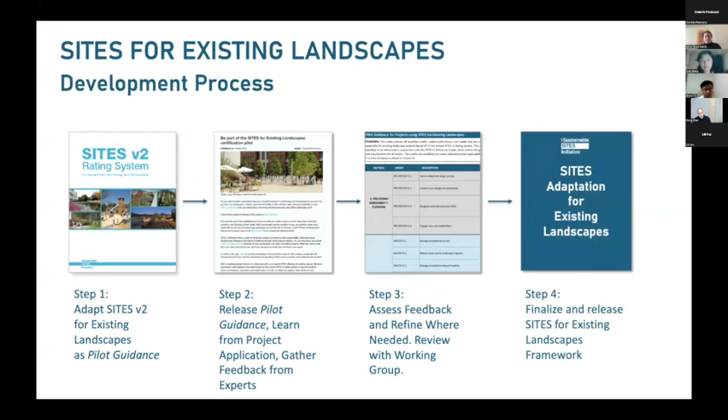I would like to introduce right away Brown Xu from GBCI North Asia. He's going to be our first speaker. I'm going to introduce all the speakers because after Brown, we will head right down our speaker lineup. So first of all, Brown joined GBCI and USGBC in 2018. He's the Director of Market Transformation and Development. He leads the marketing development and project support. He facilitates the growth of GBCI's sustainability programs in the region, including LEED, the LEED Green Building Rating System.

Brown has long worked to move the industry forward, facilitating projects including the first volume program in China, the first LEED for Cities Planning and Design project, and has participated in 2 industry committees, including LEED Data Center Advisory and LEED Logistics Advisory. Brown, before I pass it to you, I'm also going to introduce our other speakers.

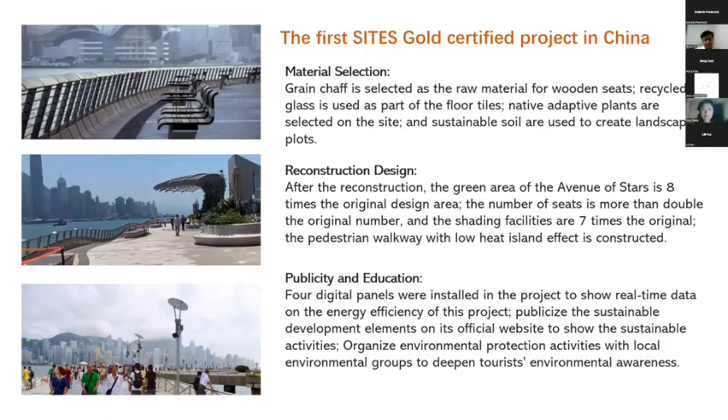The next project is the Runway Park in Shanghai, which is the first SITES certified project in mainland China. This project is very interesting. Actually, it was an airport. When the local government wanted to reschedule the city planning, they thought the airport could be transformed into an urban space for citizens and office workers to relax. This project was developed by Sasaki and Trent, who are our panelists today. They did a lot of fun work to engage people in the park.

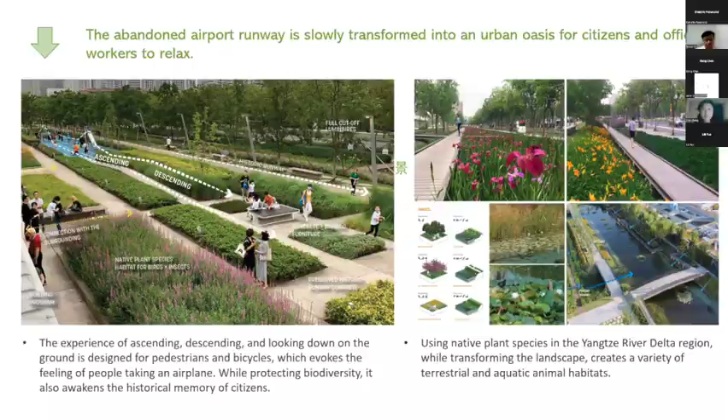The next is the 10th China Flower Expo, which is the world's largest SITES gold certified project. The certified area is about 2.6 square kilometers, a very huge project. The purpose of this flower expo is to collect different flowers from China to show to the public, while the project team also tried to keep the biodiversity and make the ecosystem stable. So 60% of the vegetated area is planted with native plants of Shanghai.

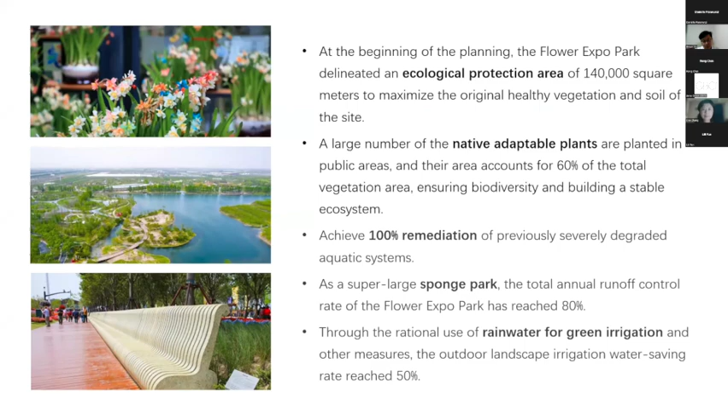They also did very good work on water treatment. In the project, they have a super large sponge park. The total annual runoff control rate of the park has reached 80%. I will talk about this concept later. Next is the Bai'etan Exhibition Center. I will leave this project to our leading actors, the consultant, the designer, and the owner, and they will give you a wonderful introduction tonight.

When we went through all the projects, we also wanted to find out why many projects now realize the value of sustainable landscape and want to pursue SITES. We think a very important reason is that China has set a very clear carbon emission goal. Chairman Xi has announced that by 2060, China will reach carbon neutrality. That really reminds a lot of people of the value of sustainability, and more people realize that sustainable development is not only about energy, it can be adopted in every industry. So we think this is a very important foundation.

The second is about the sponge city. I would say that is a very special term in China. You can see on the left of the slide that in 2015, the government already set a very clear goal that cities in China will collect and utilize 70% of the rainwater. 20% of the urban area needed to meet the target by 2020, and the proportion should be raised to 80% by 2030. So it's a very clear government activity to promote the sponge city. And China has already designed its own standard, which was officially implemented nationwide in 2019.

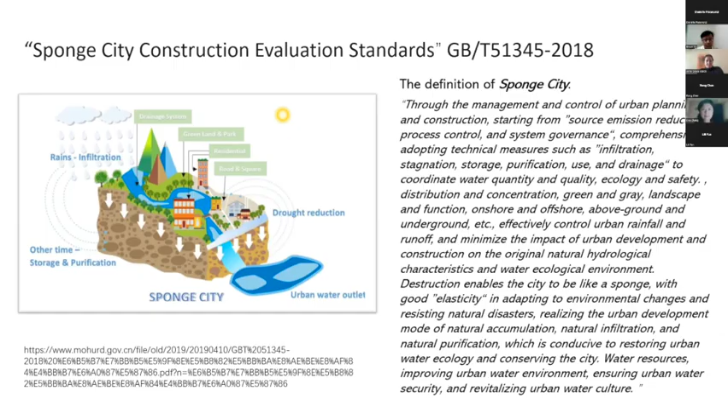So I will just introduce an example of sponge city in China. It's a very small city, which is Pingxiang. It's located in Jiangxi province. And this city actually is a very old industrial and mining city with depleted resources, so its infrastructure is very weak. So every year when you have a big rainfall, floods occur. You can see a lot of those pictures.

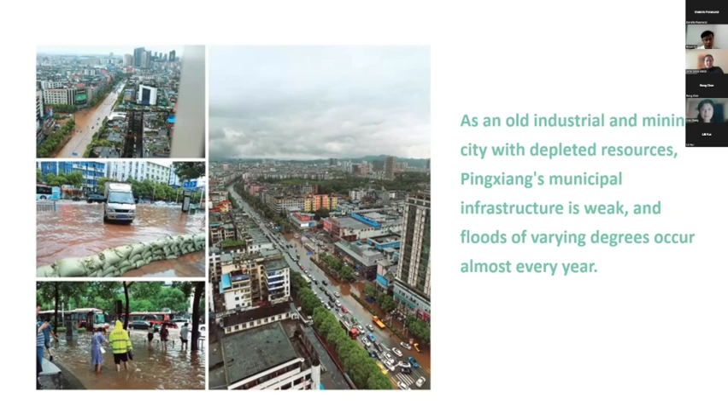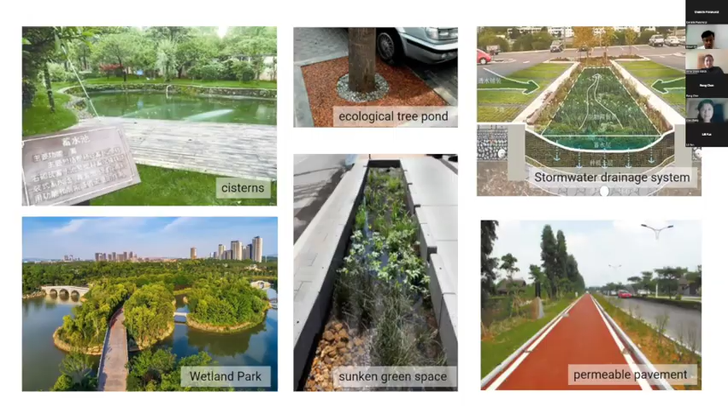In 2015, when the central government wanted to promote sponge cities, the local government of Pingxiang thought it was a very good opportunity to refresh and reconstruct their infrastructure. So they did a lot of work. All those pictures are the actual photos in Pingxiang, like the wetland park, and also some stormwater drainage system. So they tried to resolve the problem of floods and renew their infrastructure. And the result is good. You can see the difference between the photos in 2016 and 2018.

And also, as an old city lacking resources right now, they used this opportunity to build a new supply chain around the sponge city, because there is a lot of infrastructure that needs to be developed and manufactured. So there are more than 100 enterprises that focus their business on sponge city, and they expanded their business across the nation.

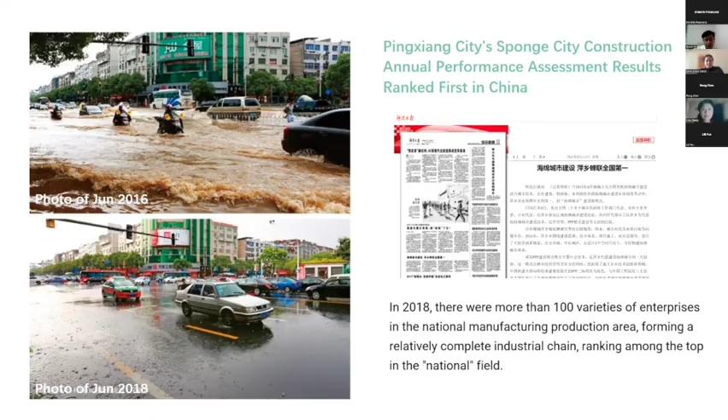So we think that China's mandatory policy on the construction of sponge cities has become a major foundation for Chinese projects to be awarded SITES certification. So they do not have a very hard time meeting some prerequisites in SITES. And also the government right now emphasizes the value of the ecological environment, and with COP15 hosted in Kunming, Yunnan, the government will pay more attention to sustainable landscape.

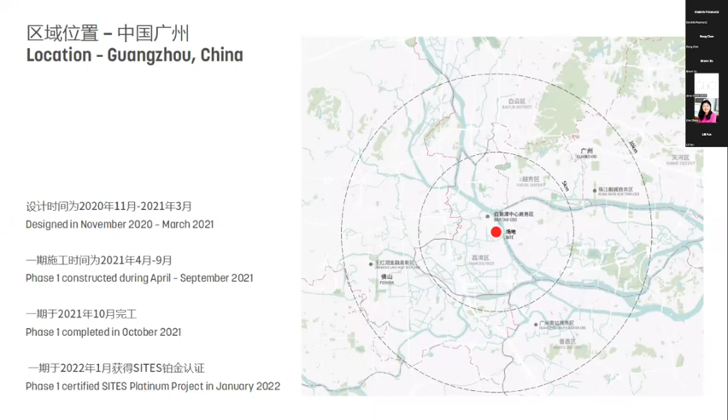We started working on the design of the project in November 2020, and the construction of phase 1 was finished in October 2021. And in January this year, we got the SITES Platinum certification. The site is located in a place of mixed culture. Among the 4 major cultures on site, the most influential ones to the site's history are Lingnan culture and industrial culture. The Lingnan culture is characterized by small settlements along the water bodies surrounded by ficus trees, while the industrial culture is mainly represented by heavy industrial facilities and big ports along the Pearl River.

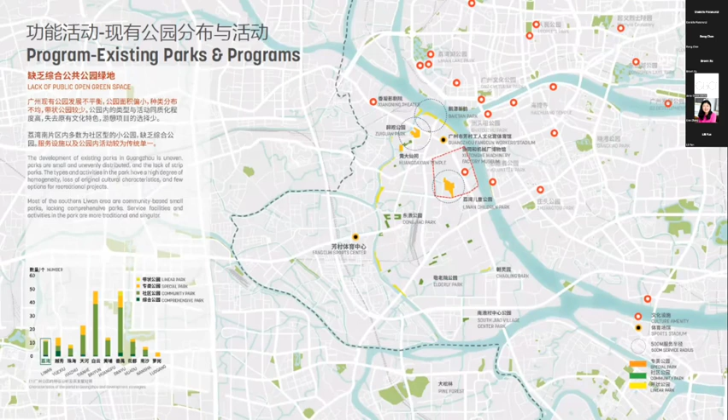With the city transforming its industrial base into other uses, many of the facilities have been moved to other places around the city, offering extensive opportunities for new uses to come in. However, today around our site, there are very limited public spaces and green spaces. Neither the industrial heritage left today nor the gardens in Lingnan style are integrated into the public realm. It was not well used before this project started.

At the same time, the city is growing. Public transportation has expanded to the Liwan area already. 2 subway lines will soon cross our site, which offers great opportunities for people to come to this area and for the area to grow into a new reactivated urban center.

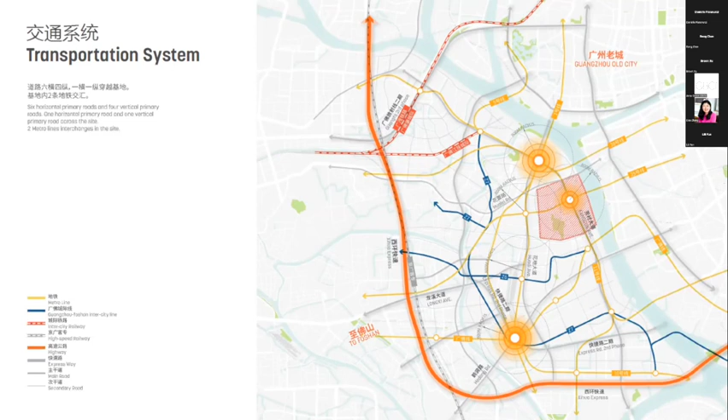So when we look at the site, we were well inspired by the site context characterized by ficus trees. No matter whether we're at the canal front or next to the Pearl River, or in front of the small villages, or even within the big factories, we can always see ficus trees. They are benchmarking all the places we have visited.

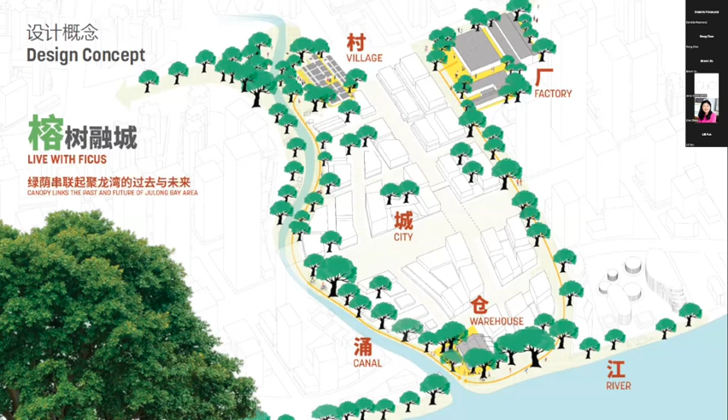So with that in mind, we came up with our design concept, Live with Ficus. We want to use groves of ficus to link the past and the future of the Julong Bay area, making it a real characterized new urban public realm.

We distilled the three very important elements from the site, the ficus, the warehouse, and water, into abstract patterns and applied them into different parts of the landscape to make a new Pearl River and city grow on our site, by connecting the city and the Pearl River, creating a continuous green belt system, improving the current site conditions, and increasing ecological habitat.

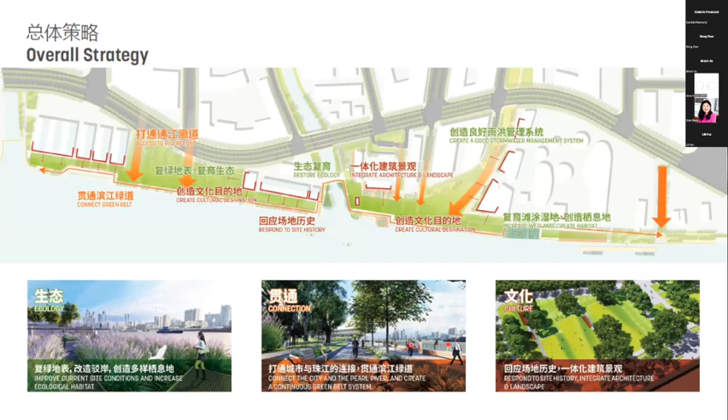At the same time, responding to the site history, we integrate architecture and landscape to create a very important linkage and segment of the green belt system along the Pearl River.

Zooming into our phase 1 area, before the construction started, the existing site was characterized by the historic warehouse, which was built in the 1950s, a lot of big ficus trees, some dating back 300 years, and some very important industrial elements along the water's edge.

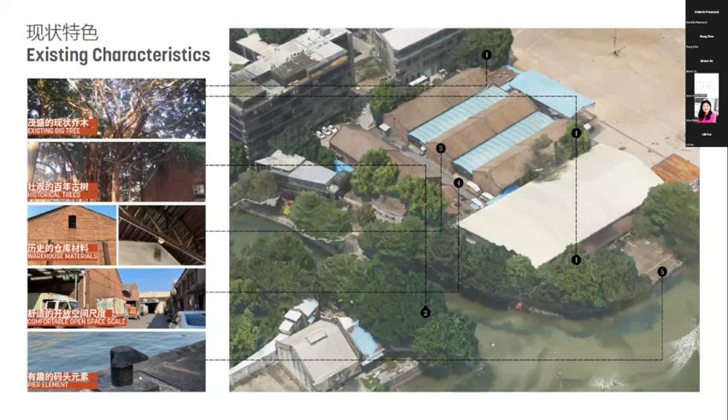At the same time, there are a lot of challenges on site as well. A big building addition has blocked the connection between the historic warehouse and the riverfront. Existing flood walls have separated the warehouse area from the river's edge. And a lot of invasive plants were spreading around the entire site.

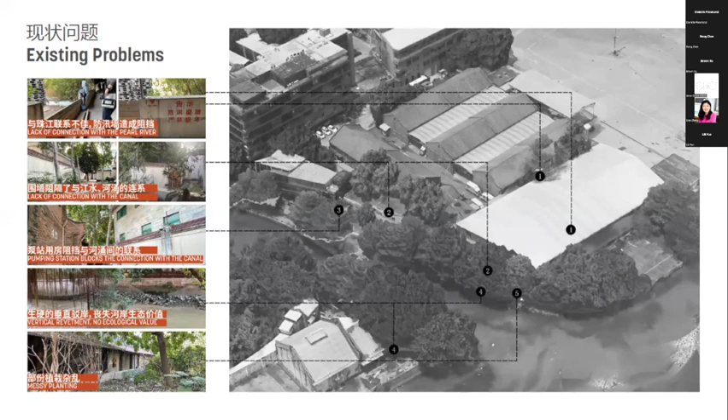So after analyzing the existing conditions and exploring the potential of the site along with our client and architects, we came up with this design of phase 1. We removed that building addition, making space for the new riverfront plaza to allow people to come back and reuse this riverfront space, recreating the connection between the warehouse and the riverfront, and exploring opportunities to restore the previous dock area next to our site to allow boats to come ashore. At the same time, the design preserved extensive existing trees along both the Pearl River and the canal.

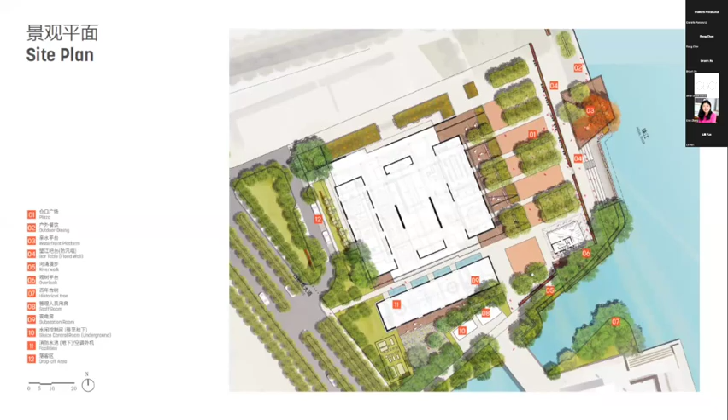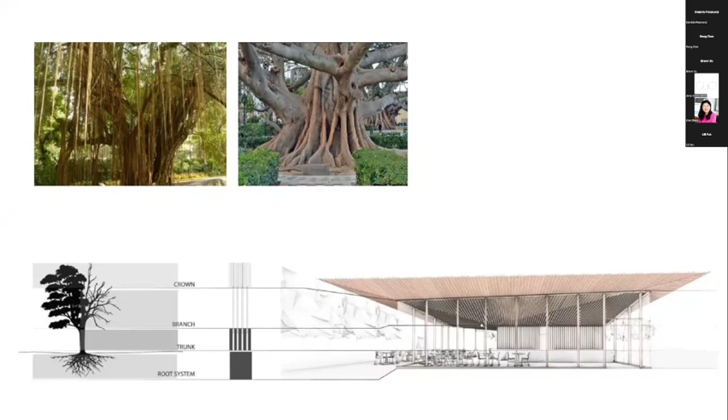So after the building addition was removed, we created an extensive riverfront plaza to allow people to enjoy some relaxed time and providing opportunities for gatherings at the riverfront. On one end of the plaza, we proposed the ficus pavilion, which was inspired by those historic ficus trees around it. After the pavilion was built, it has become so popular that some people have been using it as their alternative working space.

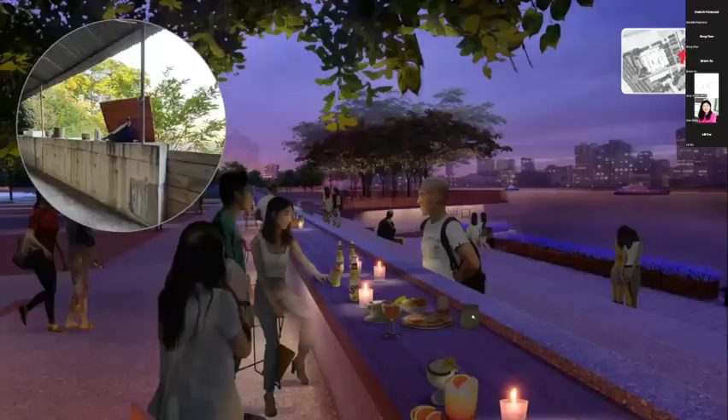The existing flood wall was integrated into the landscape design. It's converted into a bar table, which has changed this barrier between the riverfront and the plaza into a very important landscape amenity at the riverfront.

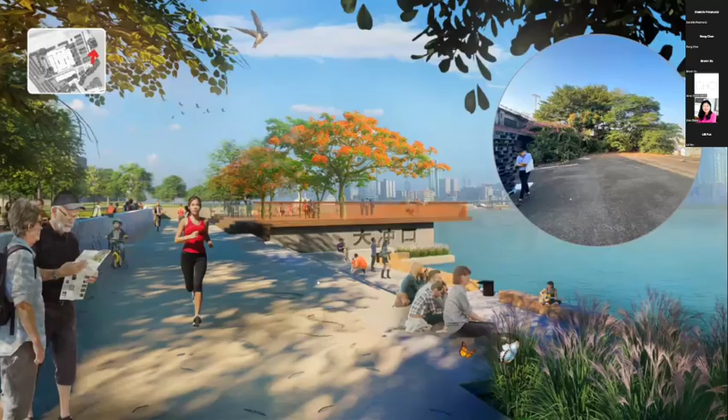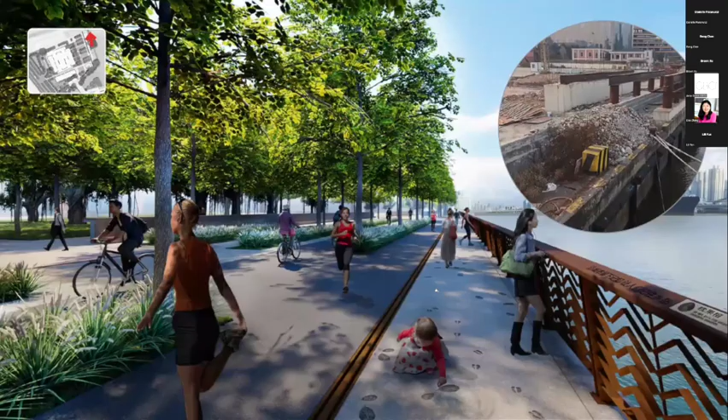We also tried very hard to restore this dock space to allow the boat to stop here, allowing people to get on and off the boat from this location. The old port edge was also restored, and we integrated the walking paths, the jogging paths, and the bike paths into the area. So that becomes a very important linkage in the Pearl River Greenway.

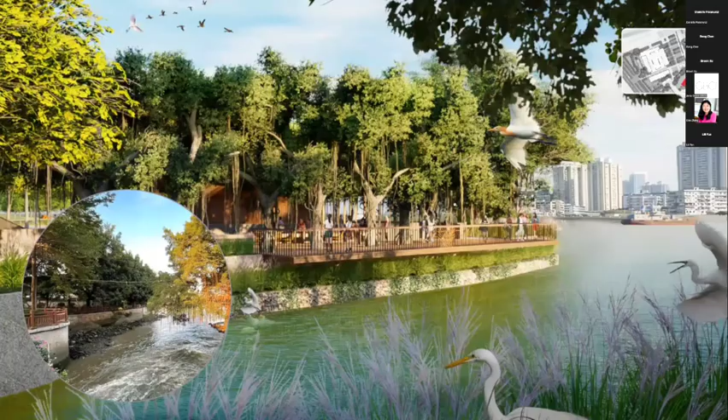Along the water's edge, we also introduced terraced gabion walls to improve the edge condition and allow the plants to grow, and also integrated another overlook at the canal's mouth, which was built around the existing ficus tree groves.

So the entire landscape design for the project has been taking multifaceted sustainable initiatives. When we look at sustainable landscape, we see it not only as environmental sustainability, but we also focused on its social and economic perspective to make it a systematic design thinking.

So on the environmental value side, we pretty much followed what SITES has outlined. For the site context, since we're dealing with an existing site, we have automatically satisfied many of the prerequisite points, and we have automatically gained some credits in the site context chapter.

Then moving into the design credits, we have designed rain gardens to collect the runoff from the building roofs and use that as an amenity on site. We have also introduced stone dust as a permeable surface for the extensive plaza area to allow the water to infiltrate into the soil underneath. And at the same time, since we used all native plant materials, we have eliminated irrigation on site.

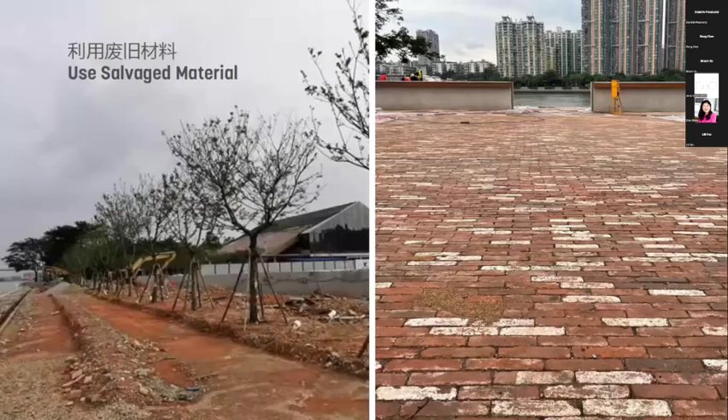And in terms of materials, we tried very hard to reuse salvaged materials, both on the finished surface and also in the base layer. Some of the materials demolished from the existing buildings are reused in the exterior as benches, sometimes as signage walls.

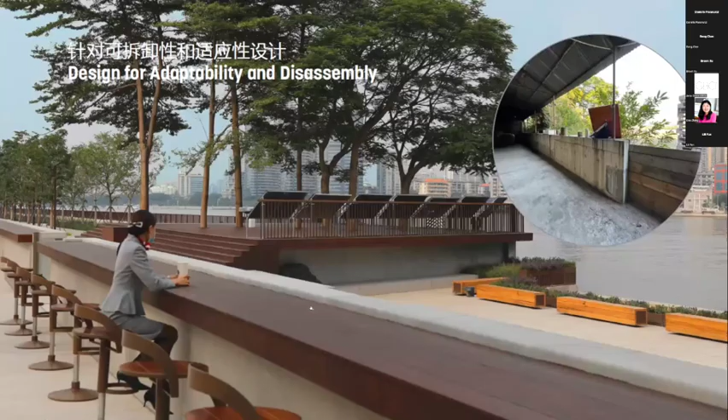At the flood wall, as I mentioned before, we converted that into a bar table. We introduced precast concrete cladding on the surface and bamboo slats on the top. And all of these assemblies can also be disassembled.

And across the entire site, we used bamboo slats to replace wood slats at all the decking. Since bamboo is a fast-growing material, and it's also native to the area, that kind of replacement of wood material can protect the forest.

So besides all of those initiatives related to environmental value, we're also putting our focus on increasing the site's social value and inheriting the site's cultural value. The entire site is universally accessible and open to the public. It offers nice space for people to retreat and relax at the riverfront.

Integrating the riverfront with the Pearl River Greenway system will support physical activity, and the gardens and various gathering spaces support social connection. And as I mentioned before, we distilled the site character into some symbolic graphic patterns and applied those patterns to many site elements, such as the wall cladding and the railing, to remind people about the site history and its local character.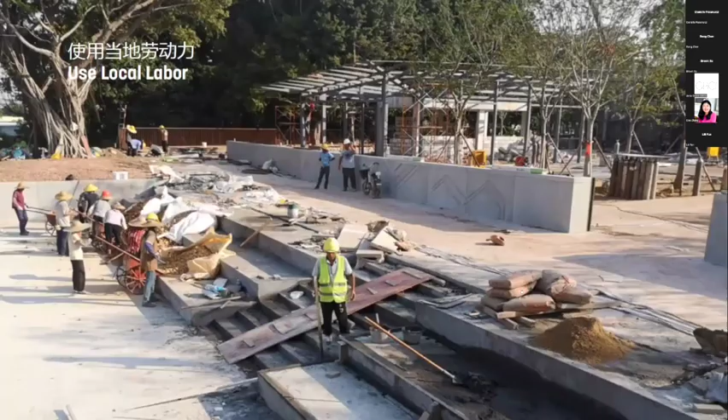The economic value is something many projects don't always focus on, but in this project, we are trying to create economic value at the same time. Besides using this phase 1 project as a catalyst for the entire redevelopment of the Julong Bay area, the project also used a lot of local labor, which will support the local economy.

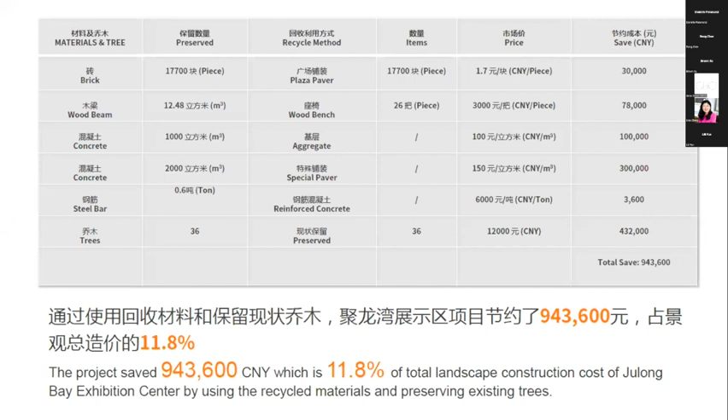And also by reusing and conserving a lot of existing materials, both hard materials and plant materials, the landscape construction saved 11.8% of its cost, which contributed to the project's success. So in the end, we got the first SITES Platinum certification in China.

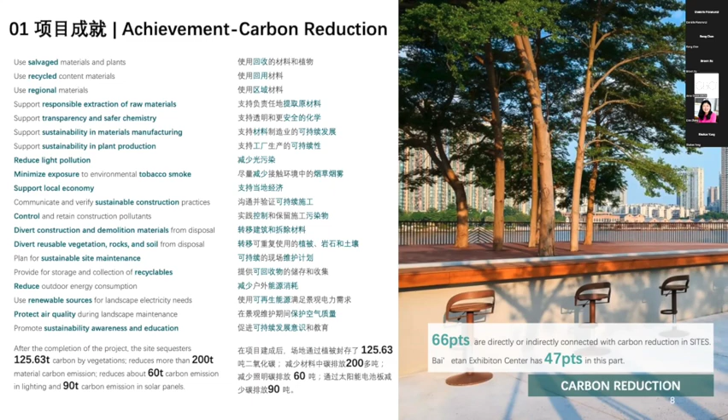We also considered a lot of strategies to reduce scope 2 carbon emissions by using high efficiency equipment like LED lighting and by implementing PV panels. So this January, the project received its great achievement, the first SITES Platinum certified project in China. And it's a great honor for us to be a participant.

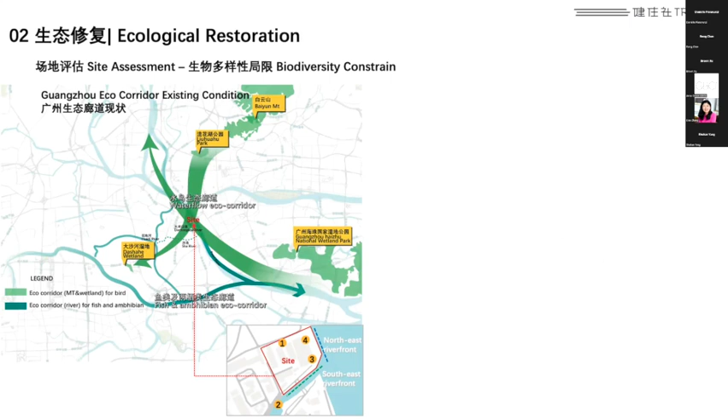Now I will give some further introduction on the ecological restoration and carbon emission reductions. The project is located in the ecological corridor of Guangzhou, as also introduced by Mr. Chen just now, and it's in the intersection space of the eco-corridor for birds and the eco-corridor for fish. However, the project also has many ecological limitations, such as a lot of hard pavement because it is a previously developed project. And also the surrounding water quality still has space to improve.

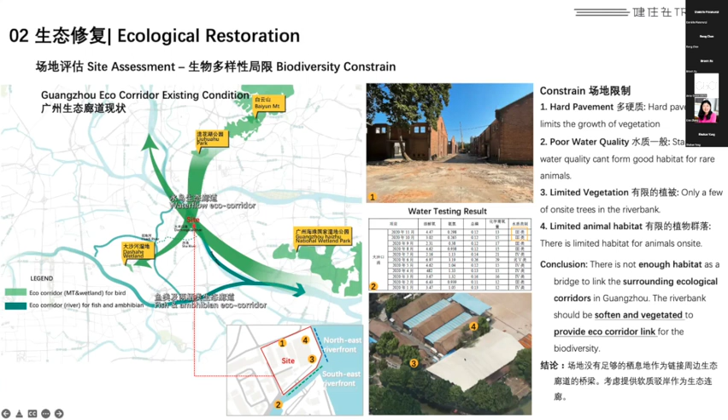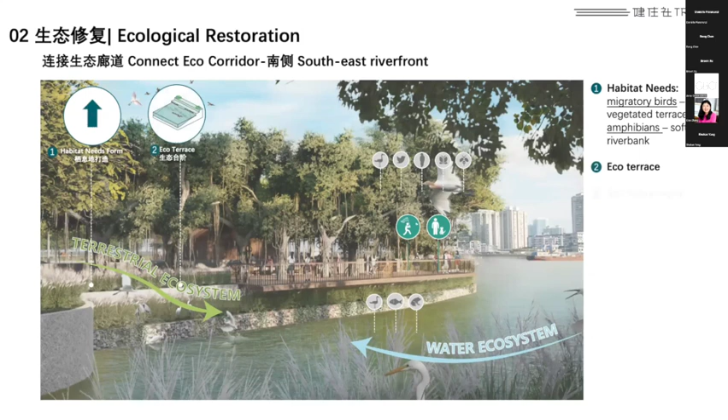There is existing vegetation, but if we consider the site as a whole, the green areas can be increased. So overall, there is not enough habitat space and it cannot connect to the surrounding ecological environment. The riverbank can be softened and vegetation can be provided to recover its eco-corridor link function. The construction of the project considers the reconstruction of the eco-corridors horizontally and also vertically. This is the eco-corridor link of the riverfront in the southeast.

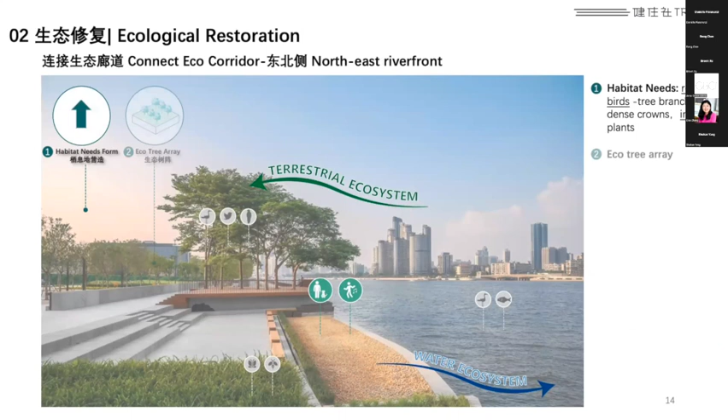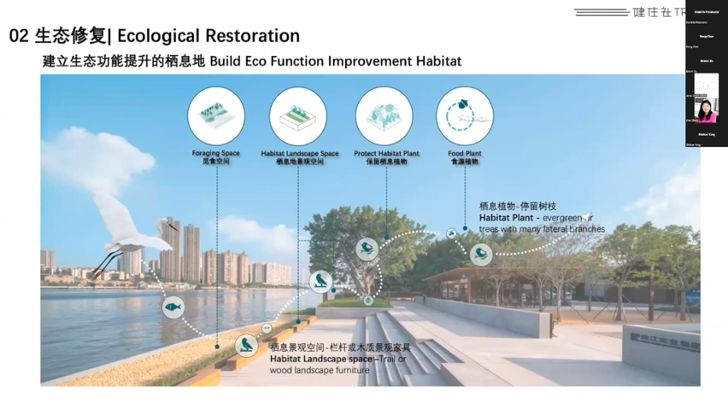The project provides habitat plants, living places, and food sources for animals. And once it was built, it began to attract birds. We look forward to more birds and more animals coming back to this project.

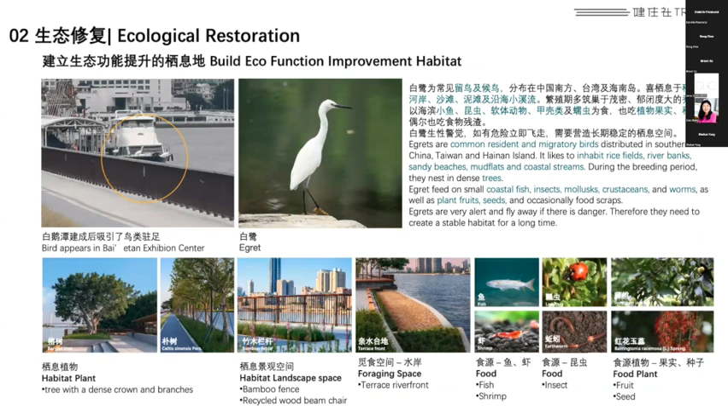We started practicing SITES in 2019, through the first SITES project in mainland China, the Runway Park in Shanghai. Since then, we have gradually practiced the SITES concepts of ecological restoration in various projects, like a university campus. Kunshan Duke University, I think, is the first university project to pursue SITES.

We also use SITES as a very powerful reference to develop internal biodiversity standards for companies in China. After the Kunshan Duke project and the Runway Park project, clients came to us and requested us to develop internal biodiversity standards and ecological restoration standards for them. And we consider SITES a really great reference.

Now SITES has been used for residential projects in Tier 3 cities in China, and also super high-rise commercial buildings in Tier 1 cities in China. Last year, we were invited to be one of the participants of a China local standard. The standard's name is Park City Evaluation Standards, which integrates ecological restoration practice, including biodiversity ideas. Through our own experience, we can see the impact of SITES in China from one project to another and from project practice to industry change.

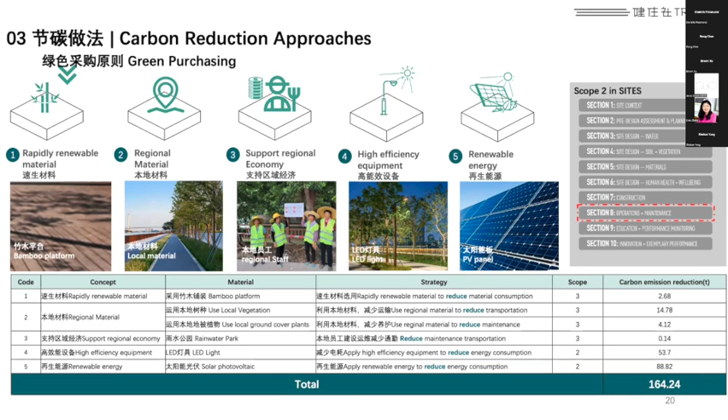To reduce the scope 2 carbon emissions, we use very high efficiency equipment in our projects like LED lighting, and also high efficiency equipment in the building itself. And to further increase our sustainability goal and reduce our carbon emissions, the projects planned to have PV panels on the project sites to further reduce the carbon emissions.

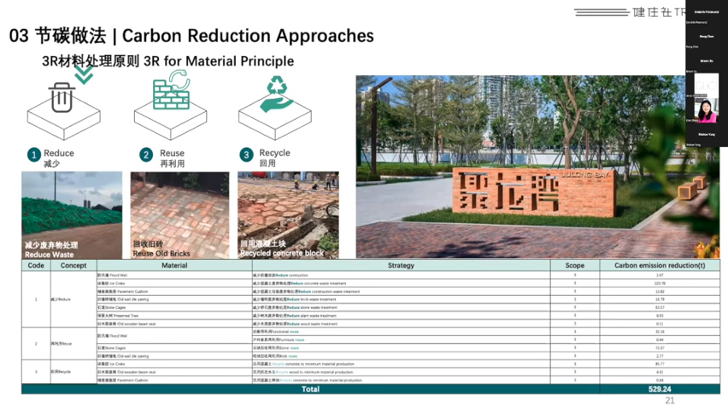The other principle is the 3R principles: reduce waste and reduce the material utilized for these projects, reuse the materials that could be considered as waste, and recycle materials for this project. And we also follow the ISO standards and the China local standards to do the carbon reduction calculations to see what the result is after so many practices.

And we are satisfied by the results that we achieved. But of course, we look forward to some further achievement, because carbon reduction and sustainability is not a one-time practice. It should be a life cycle approach.

Since China launched its 30-60 carbon goals, we have developed very sophisticated policy systems in China. And we think that the SITES standards can be fully consistent and in line with China's 30-60 carbon goals. And as a sustainability consultant, we have helped various kinds of projects to achieve carbon reductions, including factories, offices, residentials, and parks. And we also look forward to more carbon neutral practice with further market development of SITES.